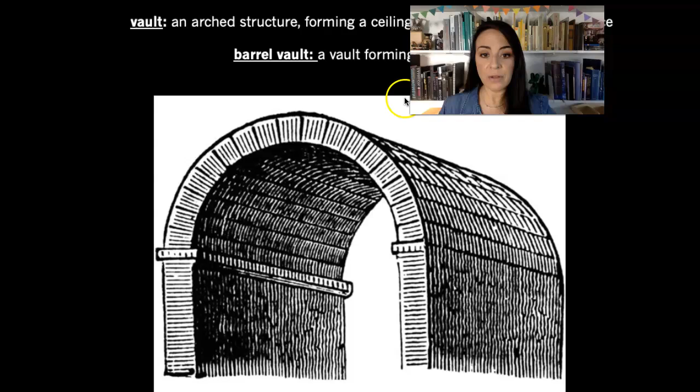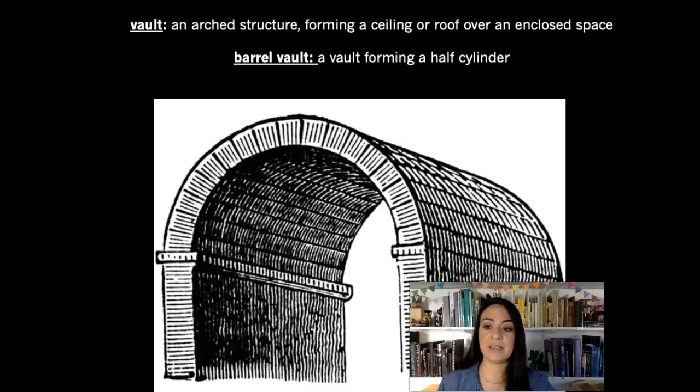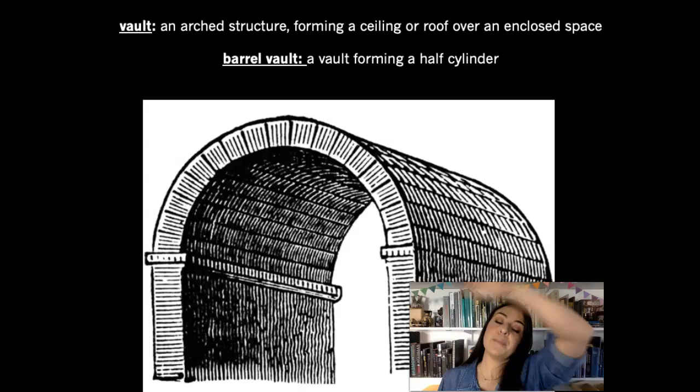And you already know about barrel vaults. We talked about them in the Sanctuary of Fortuna Primigenia in the Roman Republic period. But just to remind you, the vocab term: a vault, an arch structure forming a ceiling or a roof over an enclosed space. Specifically, these are barrel vaults because they are rounded arches that kind of resemble a barrel.

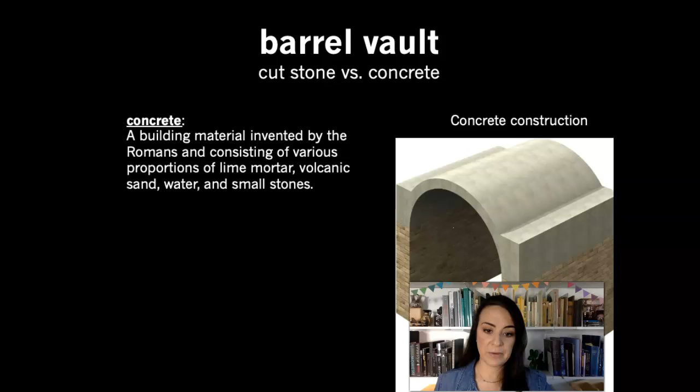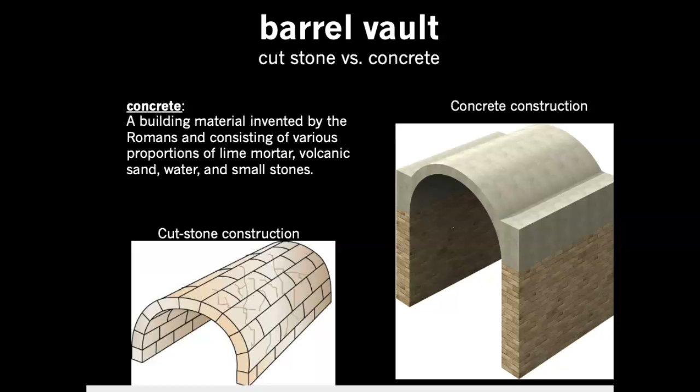And they were made of concrete, and concrete is much more efficient than cut stone. Okay, you got it all?

So that's what we're appreciating here in the second level, or this second level that wraps all the way around the Colosseum. But what about the first level, the ground floor?

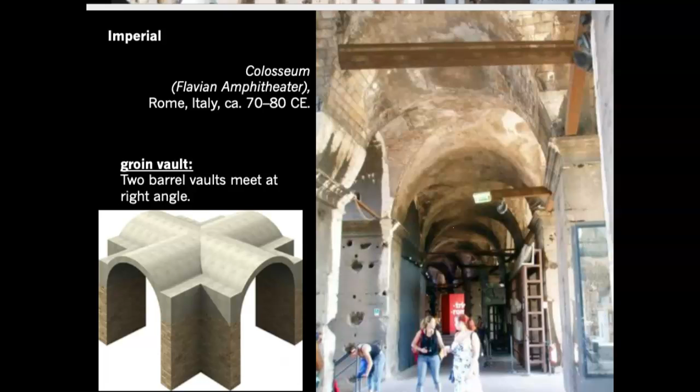Here we are looking at the ground level. So these archways are those exterior arches that open out to the outside, and then over to our left are the staircases that go into the seating.

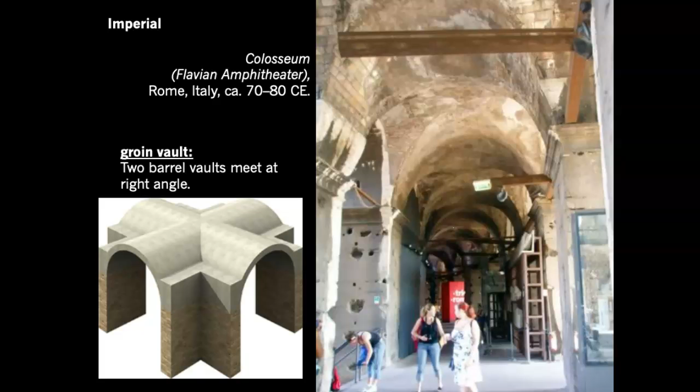So we're standing here on the ground floor, and what we're looking at above, which would have been covered in beautiful mosaic patterns, is a groin vault. It's different from the barrel vault just above it. Do you see the difference? Barrel vault, this is a groin vault.

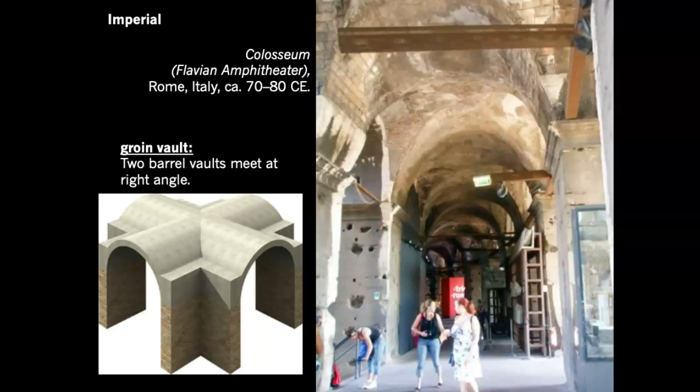Now I'm giving you a diagram here to help illustrate what kind of construction we're seeing here. So we have a barrel vault that continues all the way around the Colosseum, right? But it's intersected by these archways that come from the exterior and go interior. And what they do is they create this X pattern.

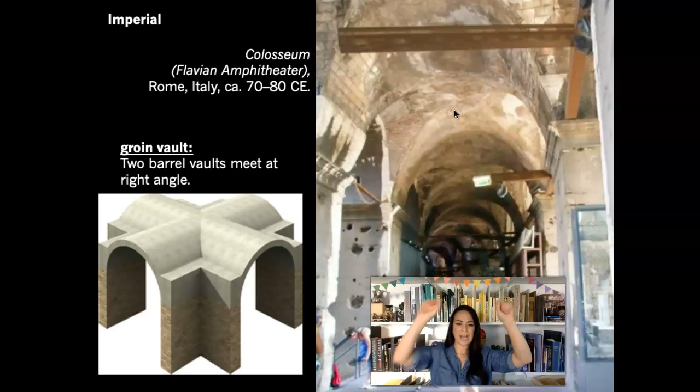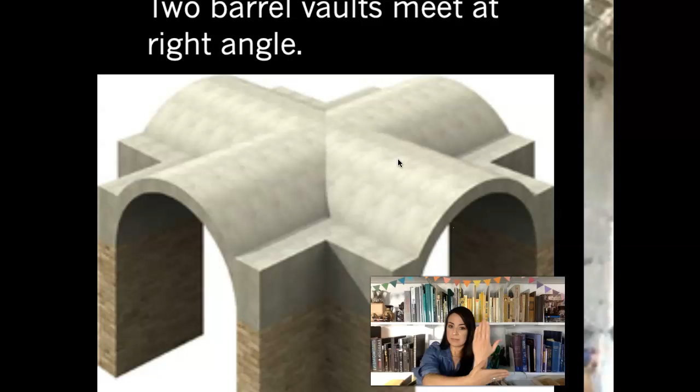Here, this is a diagram of a groin vault. So you have two barrel vaults, and to make a groin vault, you take one barrel vault and you cross it perpendicular with a second barrel vault. You see that? Two barrel vaults cross together, make a groin vault.

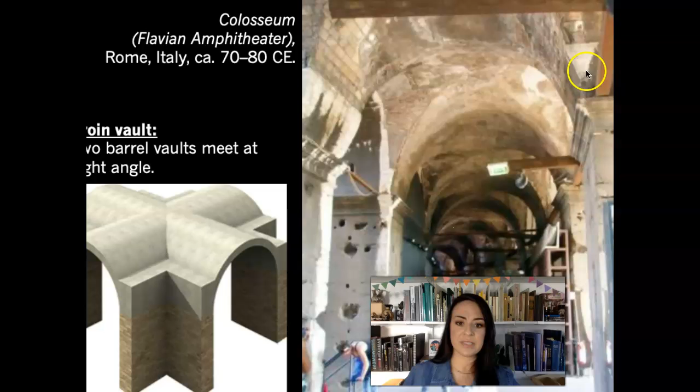There's our barrel vault, and then intersecting with these side barrel vaults. It's called a groin vault because the shape that it creates between those two intersecting barrel vaults kind of looks like legs and a groin. Does that make sense? There's your two legs and there's your groin.

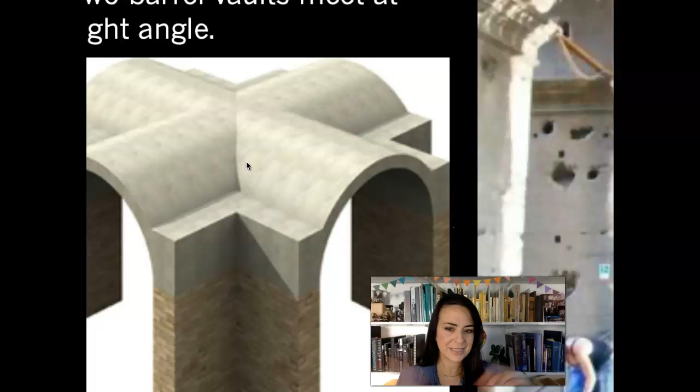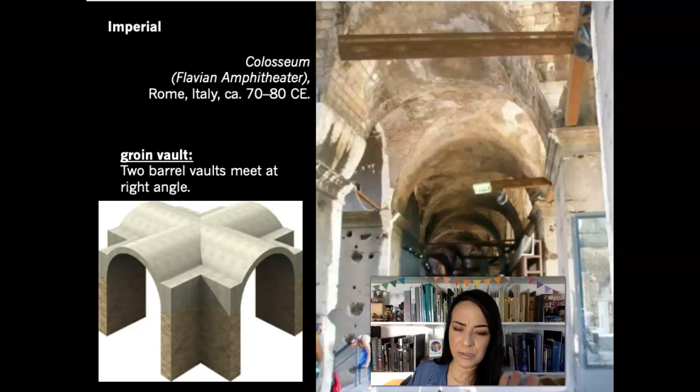So we have groin vaults down on the ground level. Now a smart student in class would think to themselves, why? Why don't you just use barrel vaults? We already know that rounded arches are great.

Why are you messing with this? Well, it's all about efficiency.

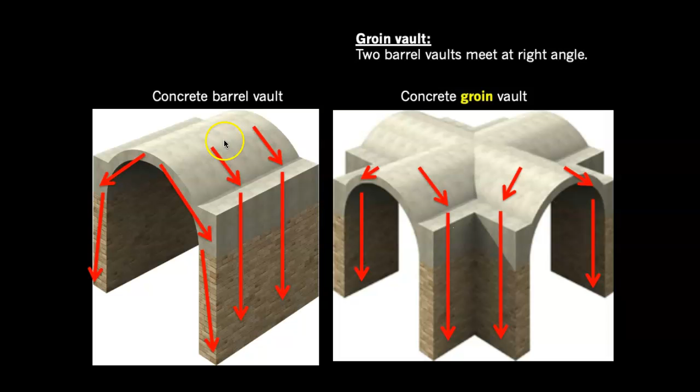A groin vault is much more efficient at forcing the weight of gravity down and away from the center of an arch. A barrel vault, we already know, directs weight to the walls. However, a groin vault has a more focused direction. It not only focuses it down to the walls, but you can pinpoint it to specific corners of those walls. So rather than the entire wall bearing the weight of the arch and whatever is above it, with a groin vault you can direct it to smaller, more specific points, therefore opening up portions of the wall with more archways.

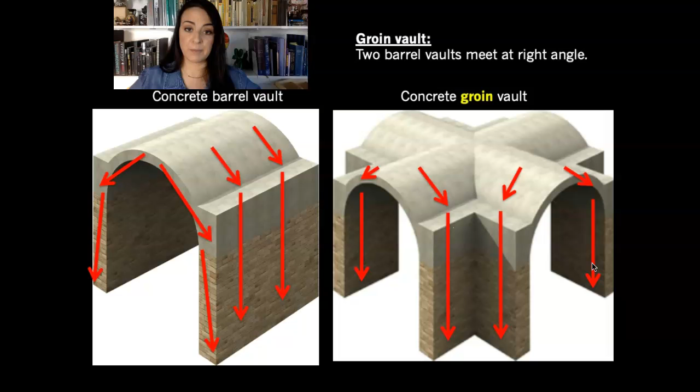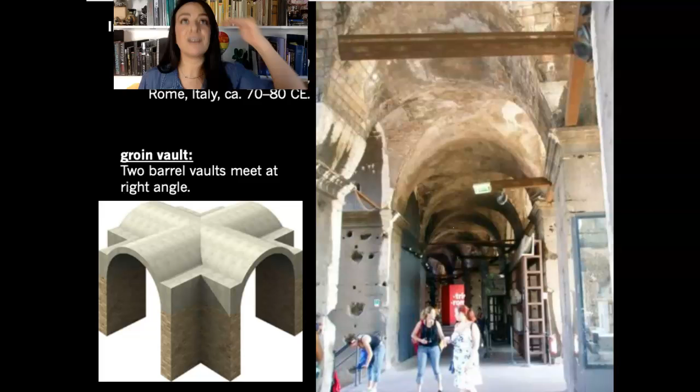A groin vault is more efficient at directing the weight of gravity and the building to specific points. This comes in handy when you're thinking of a lower level, because it's carrying the weight of all the levels above it. So the groin vaults, located on the ground level, are more efficient at bearing the weight of the barrel vaults on the second floor, and then the open walls or open ceiling of the third floor and those pilasters on the fourth exterior shell.

Does that make sense? I hope it makes sense. If I was in class with you, I'd be able to read your faces and ask, does it make sense? Yes or no? And you'd give me a thumbs up or thumbs down. So let me know if it doesn't quite make sense, because I want us to understand the concept of barrel vaults and groin vaults, since they're going to continue with us throughout the rest of the semester.

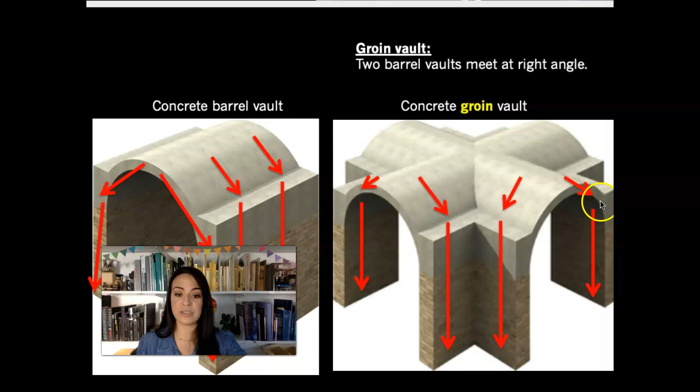So barrel vaults are great, efficient, directing weight better than posts and lintels, but groin vaults are even better because they direct the weight to very specific points, allowing portions of the wall to open up. Thinking again about the visual efficiency from the Tuscan column to Ionic to Corinthian, that translates with the use of the barrel vault and then the more sturdy, strong, stable groin vault with the Tuscan columns. So counterbalancing the chaos that happens inside of the Colosseum, the logic and order and reason of the exterior maintains the identity, the difficult identity of being a Roman.

Before we leave the Colosseum, I will tell you of one tragic event that happened. In 2015, two California female college students snuck away from their tour group on a Saturday, and they scratched their initials into one of the walls of the Colosseum.

They were only found out when a guard at the Colosseum noticed them taking a selfie with their initials.